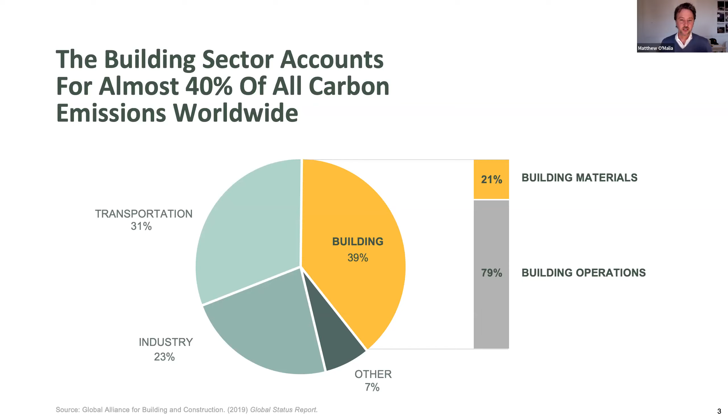When we started with this position, we thought, okay, operations is clearly the problem. Passive house is an excellent solution, let's implement that, we're doing everything we need to do, we're doing everything we can do. But the reality is that's just a snapshot in time about the impact of buildings.

What's important to keep in mind is we're on a continuum of population growth and expanding demand for additional buildings. If we think of the scale of buildings and construction over time, while it's absolutely critical to ensure every new building is built to the highest energy efficiency standards we can, the more buildings we build, the larger the impact on atmospheric carbon because of the carbon required to build these buildings in the first place.

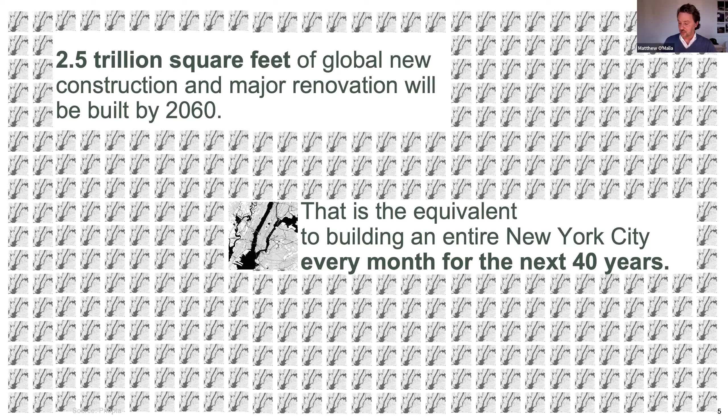When you look at that over time, and the impact of regulations, increasing code awareness, and the drive towards higher efficiency, you realize that going from 2020 to 2050, according to the AIA and corroborated by many others, cumulative operational carbon will be reduced because of energy retrofit, increased insulation, and renewable energy systems, which will flatline our operational carbon over time. But what does not flatline, what will continue to increase, is the carbon required to build buildings in the future.

As a passive house practitioner, the impact of doing the right thing with passive house or high performance building will be seen collectively—from my perspective, starting in 2008 when absolutely nobody had heard of passive house, to today where there are millions of square feet of passive house being built at different types of projects and scales. To me the change is phenomenal and fundamental. While it's still a small percentage of total square footage built in the US, passive house is having a massive impact on the overall mindset and trajectory of buildings.

But the same thing needs to happen with our building materials. And if it doesn't happen, we're going to solve one problem and still have a really large carbon problem with our building material selection.

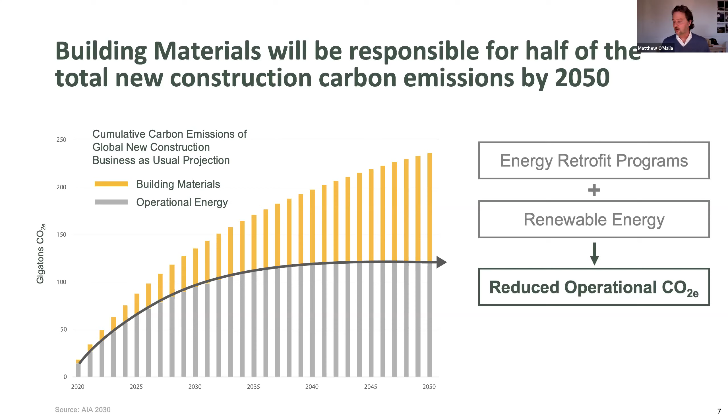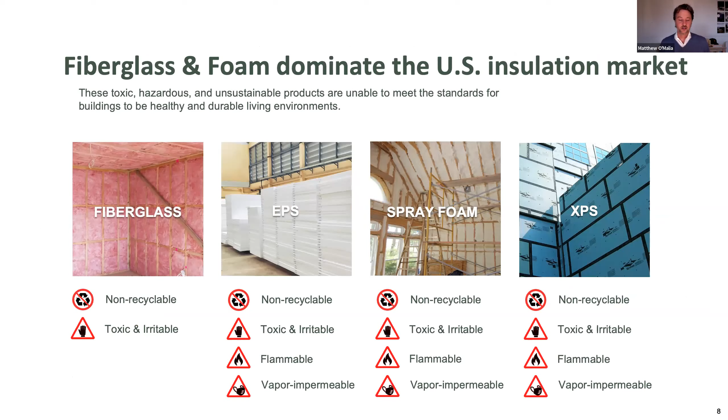As passive house practitioners, one of the differentiators we could control was the insulation products we use, and the fact that these are totally unsustainable options. In addition to being non-renewable, non-recyclable, and in many cases toxic, they also have a high carbon footprint—depending on the material, the global warming potential is extremely high.

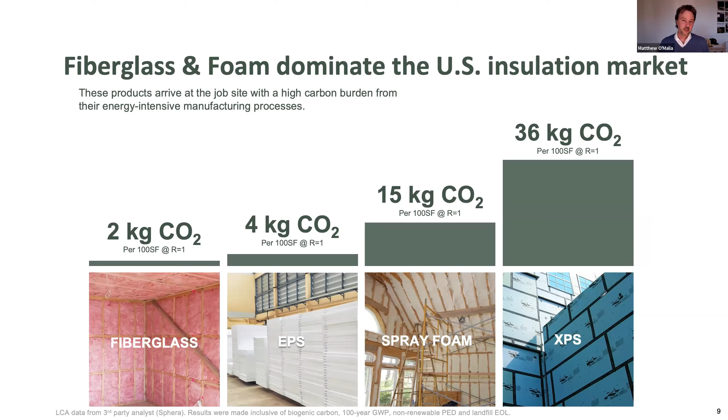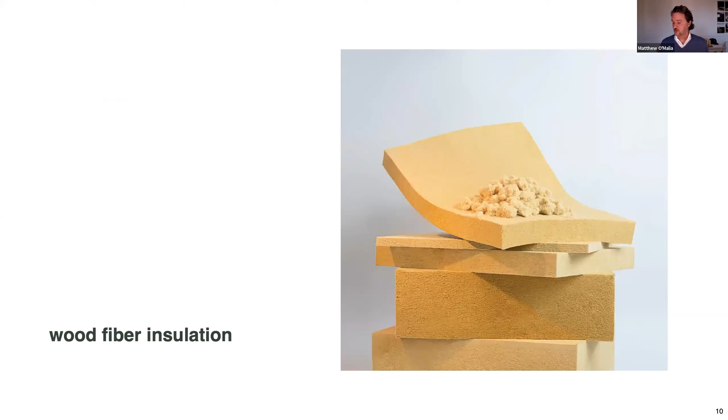As we looked for solutions toward a positive carbon future, we realized that in addition to some other construction systems we'd be using, most notably CLT, insulation is also a big area we should focus on. That's when we started down the road of understanding and developing wood fiber insulation, which has an established track record in Europe of 25 years.

It's the largest, fastest growing segment in the market. What's interesting is when you look at the forest reserves in Europe to create wood fiber insulation, it's actually quite small relative to the United States and Canada. As a result, our wood costs are a third the cost they are in Europe. So whereas wood fiber is a premium product in Europe, for us it will be a cost competitive product.

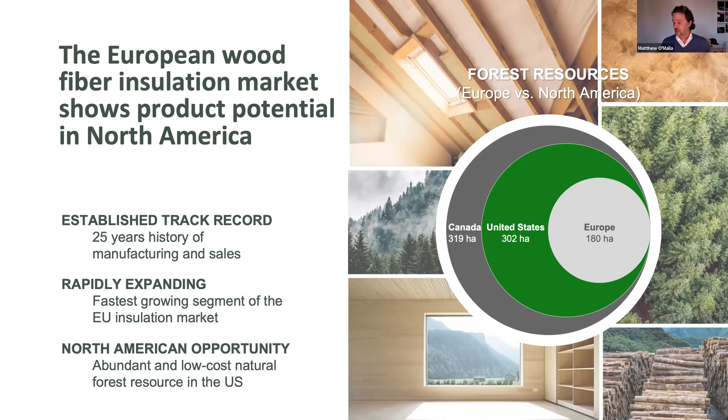If you're not familiar with it, there are 3 products: the blown-in replacement for cellulose, the batt, which is a press fit replacement for mineral wool, and a board product. Based on our early testing, the batt and blown-in have a Class A flame spread rating due to the borate in it, so it's appropriate for all construction types. The board has a Class B, so primarily more residential. But as you'll see in the project Tim presents today, we've done a large institutional project with the board.

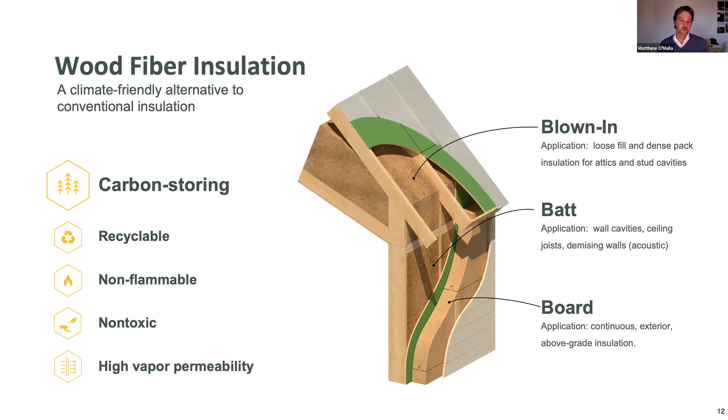One of the key characteristics of wood fiber insulation is it's vapor permeable. Foam, when required as continuous insulation, is completely vapor impermeable and presents a liability of condensation, forming a dew point at the insulation or sheathing layer, whereas wood fiber insulation is like Gore-Tex. It's breathable, windproof, and allows moisture to move through the assembly as a vapor open assembly.

The other big differentiator is that it is carbon storing. Trees, as we know, sequester carbon through their growth cycle. At the end of life, they can either get cut down and decompose and release the carbon, or we can store it in building products.

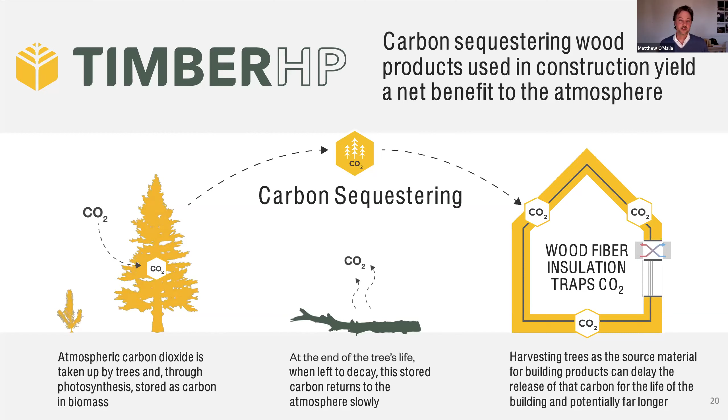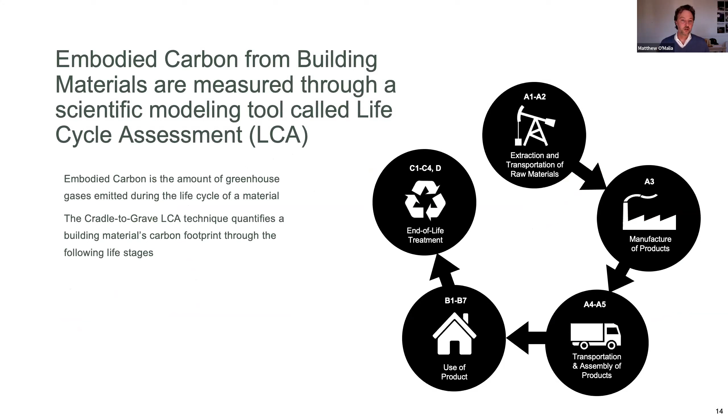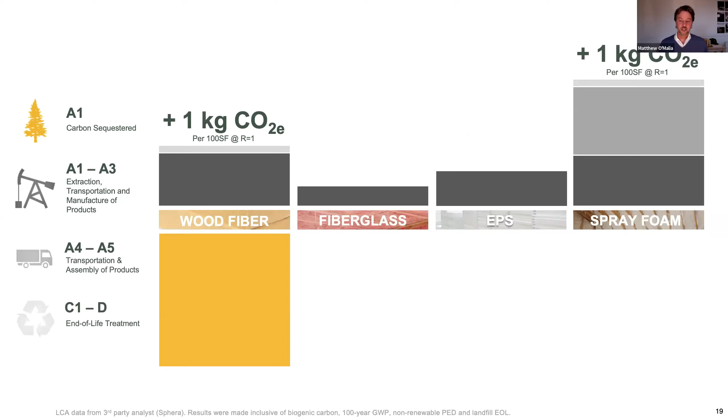That, I think, is the big differentiator from standard insulation products, because when you look at the life cycle analysis, while we do require energy to make wood fiber insulation comparatively, it starts with this negative carbon balance, or stored carbon balance, that other insulations don't have. So when you're looking at the life cycle, starting with carbon, the A1 stored carbon, and then when you look at extraction, transportation, and manufacture of these materials, obviously there's an increase of carbon footprint, as does wood fiber insulation. But the key with wood fiber insulation is that we have that negative carbon balance.

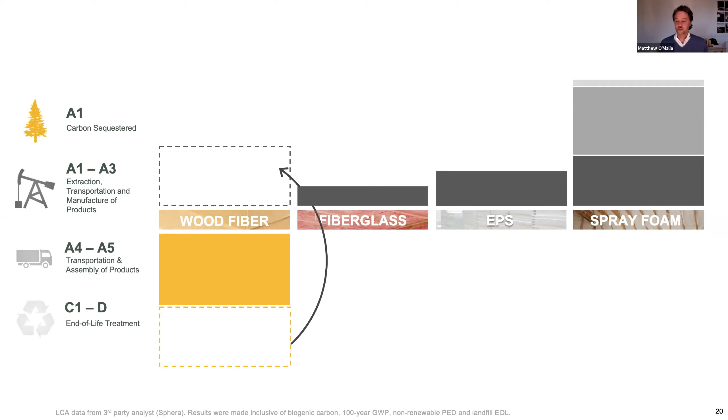This means that when we build wood fiber insulation, it comes to the job site with a negative carbon balance, where all other insulation materials come with a positive carbon balance. Like CLT, the key to wood fiber insulation is it's a replacement for high carbon footprint materials. That's the big differentiator, because for existing mass market insulations, because of their carbon footprint, it takes about 7 to 8 years of operational carbon savings to pay back the original carbon footprint of these materials. Whereas wood fiber insulation comes carbon negative to the job site.

I think the reality is, when we're thinking about retrofit programs, which are there to save carbon and reduce the energy demands of buildings, to think that by installing conventional insulation it takes 8 to 10 years to first neutralize their carbon footprint and then realize the benefit—given the rate of climate change, it's really not a good balance. We need to look at materials which are carbon neutral or carbon negative in offsetting, and wood fiber is one of them.

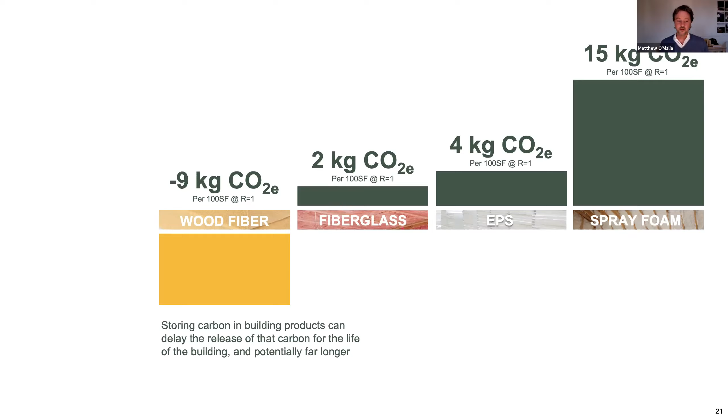We refine them into the wood fiber, add adhesives, press them, and then have the 3 product line, which is the board, batt, and loose fill. So in all, a very low energy intensive process, which maximizes the stored carbon in each of the products. Timber HP.

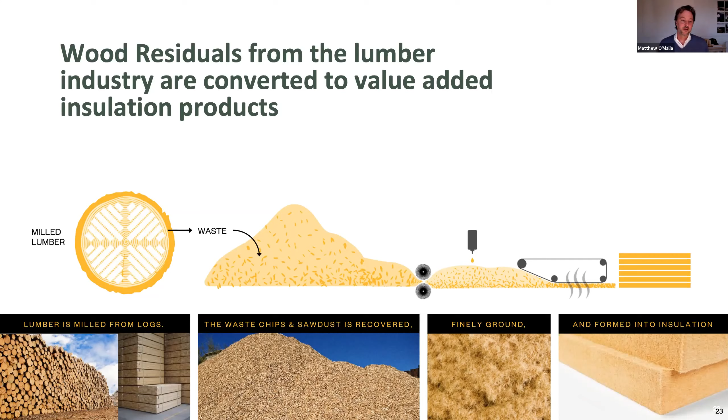GoLab is a startup, and part of what we've done is we've purchased manufacturing equipment from a used plant in Germany, and we just had it shipped to the US. It's just arrived in Searsport, Maine. We also bought this massive 200,000 square foot manufacturing facility, which was the former UPM paper manufacturing facility in Madison, Maine.

It used to be called the New York Times paper mill because they used to produce the Sunday section of the New York Times there. Like so many paper mills in Maine, we've lost 6 since 2016, which has had a net negative financial impact on the state of $1.6 billion annually.

So what we've done is we bought this wonderful facility, built in 1980. We're going to be installing new value-add processing equipment for this new product, revitalizing the mill, bringing jobs to Madison, Maine, to the tune of 113 new jobs, and really providing a value-add stream for the Maine forest products industry, which is hurting.

That's because of the decline of the paper industry. So I think this is one of these interesting cases where the synergy between a new environmental, carbon sequestering, high performance product—which is cost competitive with standard insulation products out there—is the catalyst for economic regeneration in Maine and rural communities, which is so important, particularly in a state like Maine where we've been so devastated by that, as well as being a highly sustainable environmental solution.

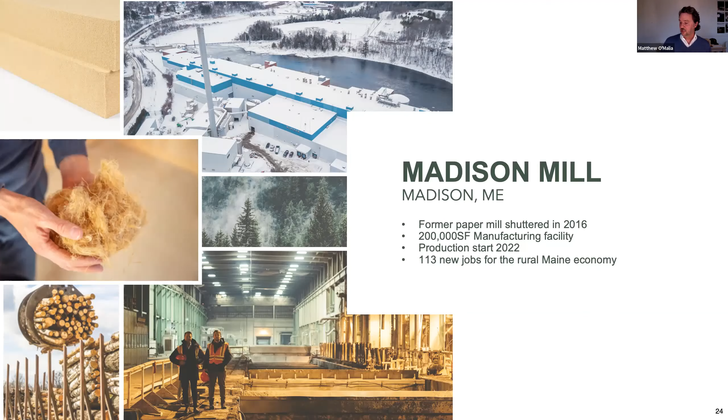I'm going to move briefly on to a project that we recently built, which is this prototyping of all wood construction—a project in Lake Waramaug, Connecticut. It was a CLT wood fiber construction. It was a funny little lake house.

It was a pre-existing condition in the shoreland zone, so it was an existing non-conforming structure. We had this very tight little cottage shape that we could build within. So the form of this building was completely dictated by the pre-existing structure that we could not expand from, and we inherited this funny little cottage form.

But the thing we wanted to experiment with was the idea: what happens if we take a really complicated form like this and use the CNC cutting of CLT, the precision of that, to make this really complicated shape? Most people assume CLT should be used for multifamily, lining up regular structural systems. We said, what if we don't do that? What if we use the export from our computer model into production as the catalyst for using CLT?

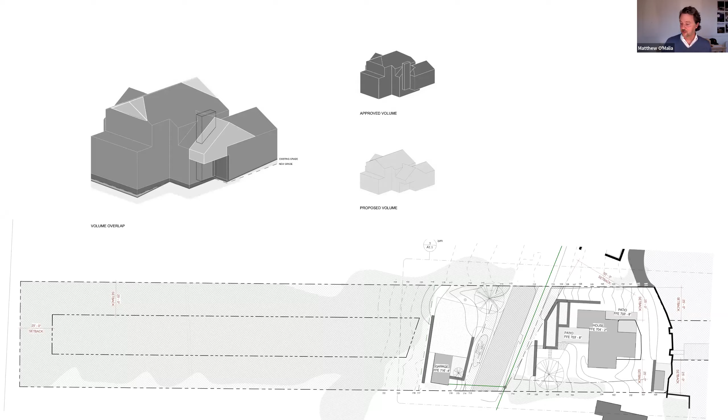So managing the complexity of that building form—that's exactly what we did. We took this 1,500 square foot plan, built to the Passive House standards, triple glazed windows, high performance exterior wood fiber insulation throughout. Very simple program, basically a 2 bedroom plan.

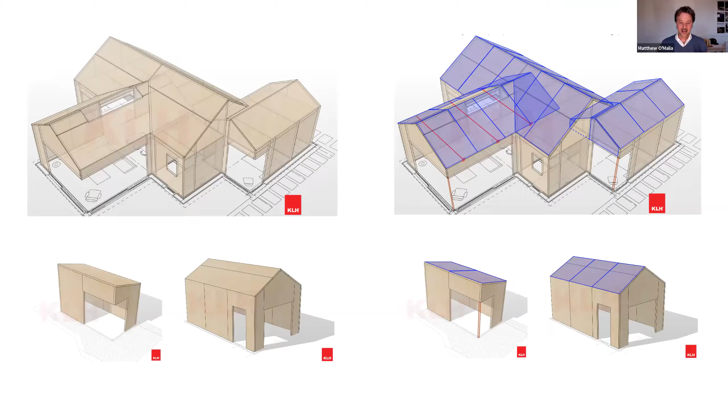We created a computer model of it, working with KLH, an Austrian CLT manufacturer, and had them create, as their process goes, a very, very detailed CNC computer model of the CLT. As you can see here, there are a lot of options in how you can structure CLT, so there's a lot of control in the design process. We worked with them on that, and they produced this incredibly accurate model that we had the opportunity to put together very quickly on this very tight site.

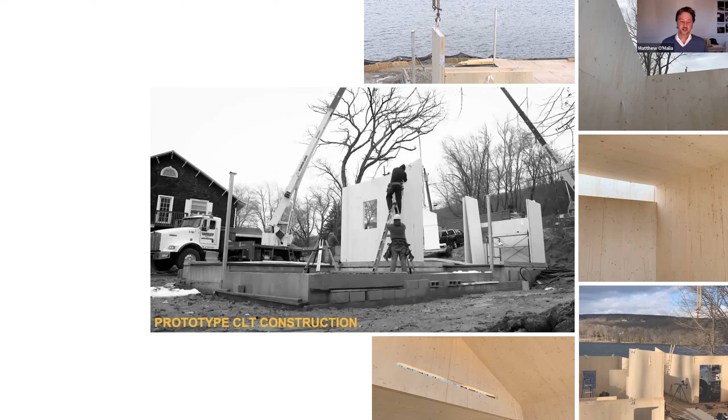I don't know if this video is going to play or not—here we go, I'll explain a little bit. This is just a little video showing how we installed this CLT project. As you can see, all the elements are pre-cut, very fussy construction. It was like 4 days in November, windy, nasty, rainy. So if you can build a building in 4 days in that condition, you can build a building pretty much anywhere.

But what was really important to us as a proof of concept is that the level of precision of the CLT, the dimensional stability, and the accuracy of the cutting was a great way to leverage construction going forward in order to control or reduce labor costs. So while it's totally appropriate for multifamily and large scale buildings because of fire resistivity, it's also really appropriate for smaller scale structures because of its exact precision and ability to increase the efficiency of the construction schedule.

So again, some of the shots are on the CLT there as well. In terms of the detailing, as you can see, there's a wood fiber shell—it was actually quite complicated with inboard gutters and a lot of very fancy detailing. Here's an image of the wood fiber insulation being installed.

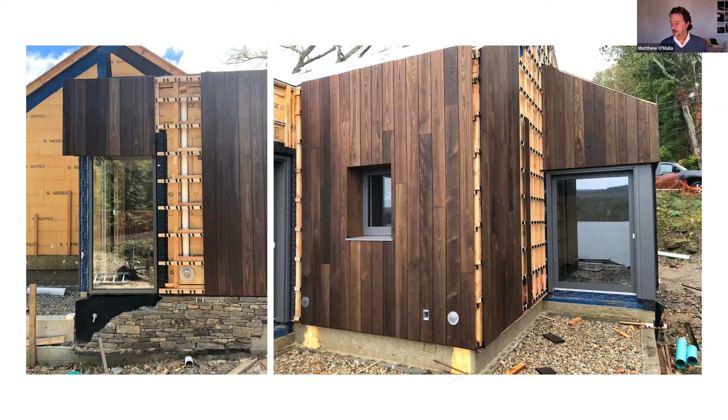As you can see, we ran downspouts, another layer of infrastructure within that behind the facade system. The roofing system was actually a Tesla roof, which we liked a lot because, as you saw from the form, it was very complicated. There wasn't a large south-facing exposure where we could do a lot of south-facing solar collection, but with solar panels on every surface of the building, we have a much greater ability to have combined total collection.

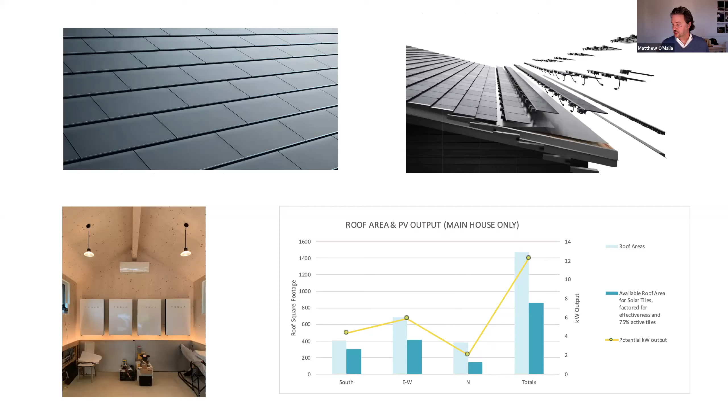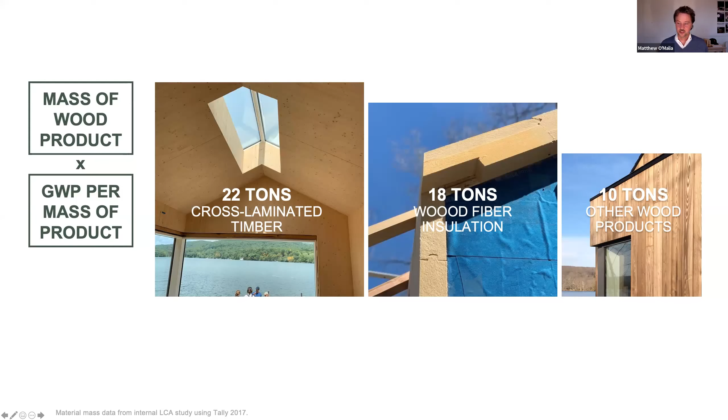Just to run through the numbers, we're trying to go for this negative carbon building, both in operations and embodied from construction. So looking at what we did: 22 tons cross-laminated timber, 18 tons of wood fiber, and 10 tons of other wood. A lot of people default to the other wood because that's easy and available, but the cross-laminated timber and wood fiber insulation is really where you find your gains, as you can see in this slide.

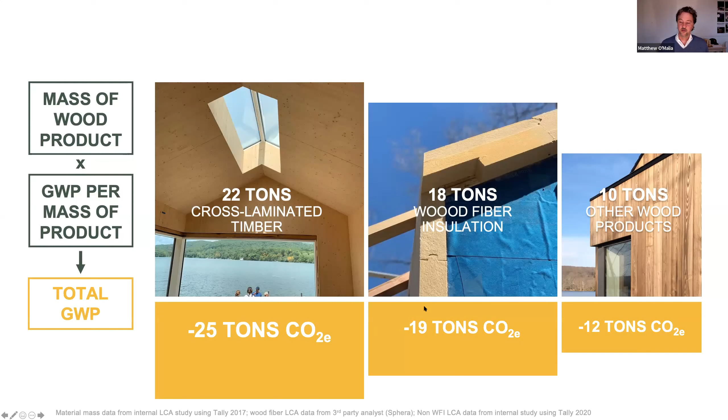So when you look at the stored carbon, or the carbon negative footprint of these buildings arriving to site, you can see the relative impact. CLT is always the big winner, given the mass, the density, and the scale, but wood fiber doesn't do so bad itself. In this case, CLT isn't replacing concrete structure or steel, so you don't have that offset—it's residential, so it's replacing wood. But obviously when you're talking about steel structures going to CLT, you have that offset.

When we look at the carbon footprint of the other building materials combined, we look at the offset of the carbons to come out with positive 23 tons of CO2 per year, which obviously isn't carbon negative to begin with. We're trying to figure out how we do that. We haven't gotten there yet.

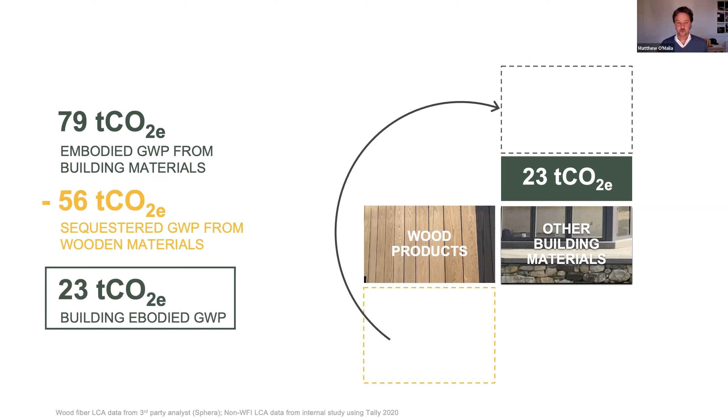But alas, we do believe that it's important to take into consideration on-site renewable energy production as a way to reach those goals. Therefore, using the Tesla roof, when you look at the embodied and operational carbon combined, or global warming potential combined, the embodied global warming potential is a constant—you start with that amount of carbon and you stay with it—but the operational is cumulative.

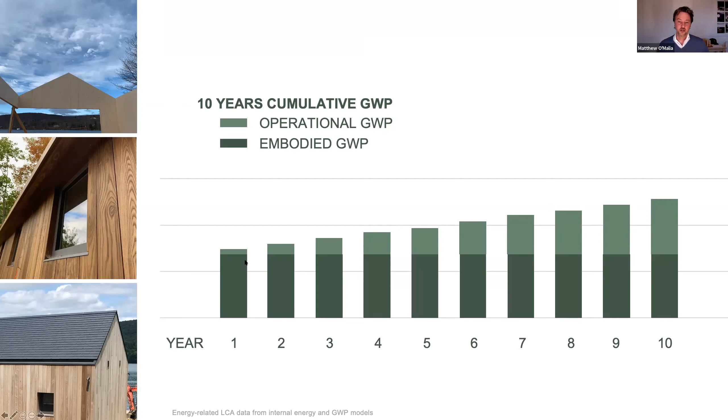But then when you're offset with our production, we're carbon neutral for the entire building at around year 7, and we go into negatives by year 10. Every year forward, we will have a positive impact on carbon by having built this building.

So I think that's what we really see as the opportunity. I don't think architects have really thought of it in those terms, but in building a building, we can have the impact of actually reducing atmospheric carbon because we built it. That's what we're proposing here: thinking of it differently, not accepting that every building has some amount of environmental negative impact, but thinking with the right kind of construction materials and on-site renewable production, that every building we build can actually be a force of positive change in the environment going forward.

And for us, that's what we founded Opal on, is that belief. We're trying to put that into practice with every project going forward.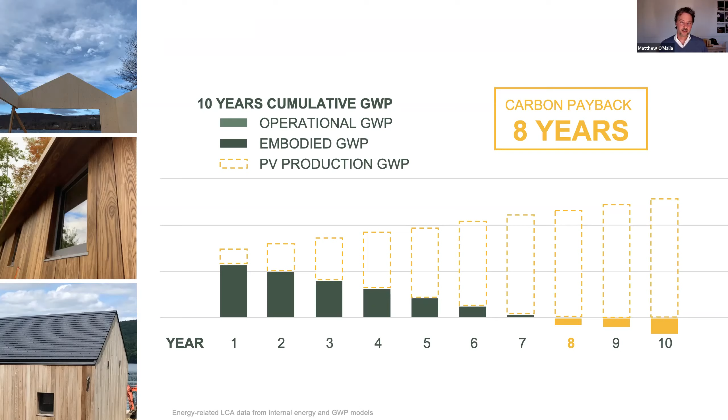So what I'm going to do now is hand it over to Tim, who will take just a second here, and he'll talk about how that works and plays out on larger scale projects that we've designed recently.

So this is a project on an incredibly tight site in Beverly on an existing campus. It was an old residential cul-de-sac that got turned into a campus over time. They have this very challenging site between a lot of conservation overlays that also has this radical topographical change within the depth of the building of 11 feet, currently mitigated by a long circuitous outdoor pathway. It wasn't accessible.

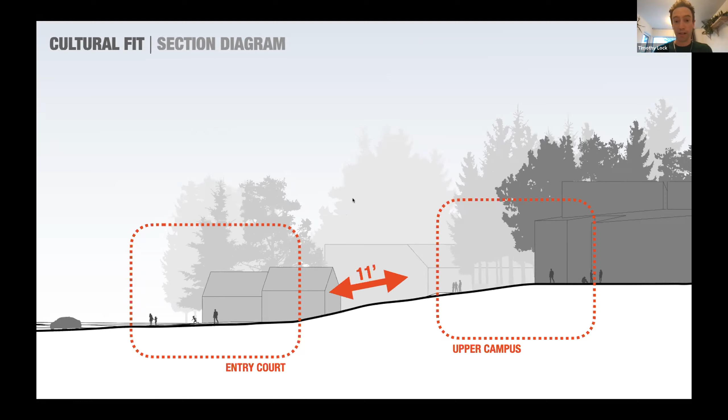So the building had this challenge of becoming an active bridge between upper and lower campus, but then also we are 100% committed to being a certified Passive House. Like, okay, well, we've had this challenge before, let's try it again. And then added to that was this communal aspect to the school - they actually polled the entire student population.

This is grades 6 through 12, on what they wanted in the space. And this crazy thing that came out of it was this idea of adventure - they have this forested campus, they want it to be this adventurous building, which added another layer of complexity to a Passive House approach.

The gut reaction as a Passive House would be to say, okay, we want to make a bar building because it's as compact as can be. It has as small a volume as possible to surface area, which for us in COTE makes sense - that's going to be an achievable Passive House. But then it just has this kind of cobbled-on bridge to get to upper campus as part of that necessity, and we're like, that's not really doing much for us programmatically.

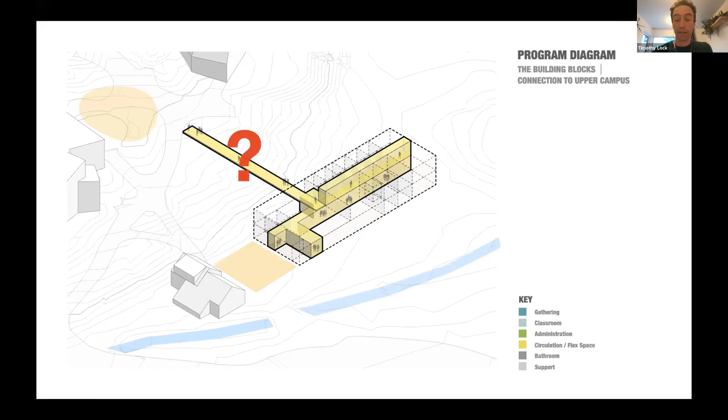It's not doing much for us as architects, as designers. Well, what if we thought about the program actually becoming that accessible bridge to the upper campus, and the building becoming the armature for that accessibility? That was a great solution that everybody loved.

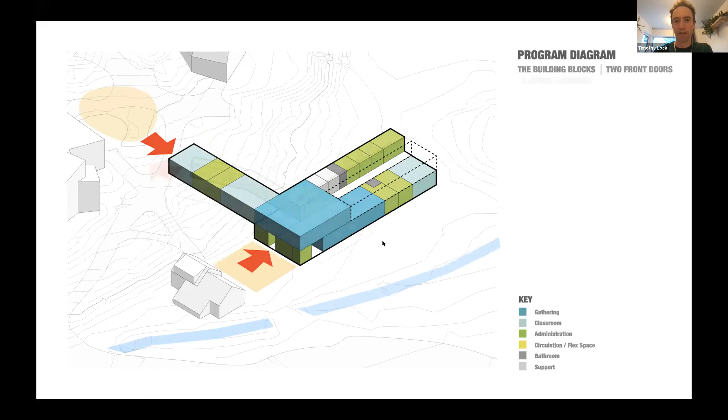But what we didn't know at that point was, could we certify that? We kind of said, okay, well, we'll accept that challenge. We did allow it to shift and manipulate to try to access that grade specifically, and then become this kind of bridge from that entry court up to that upper campus as a wedge structure. All of these decisions were made without confidence behind us to say, well, I hope we can pull off that energy ask in the end.

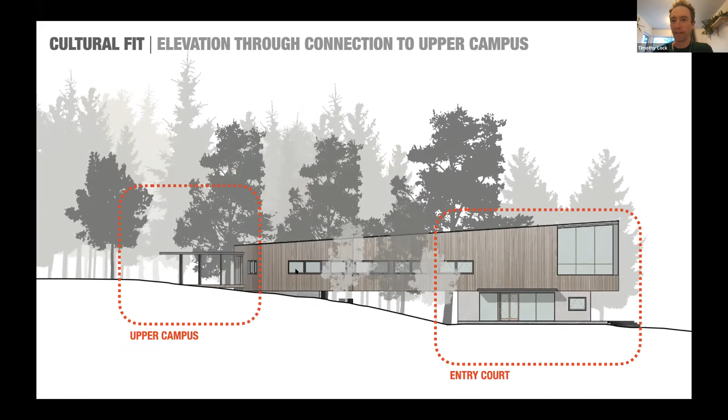And then just an elevation through that same bridge structure, looking up through the program spaces into that upper campus from the design phase.

It also involved several communal spaces for the entire school population when it's within its building. So not only does it have this complex form, but it's also a high occupancy building, which those of us familiar with Passive House work might know becomes a particular challenge in the area of overheating. So again, stacking up the challenges and trying to march forward with a building that can be transformational and still achieve a high sustainability goal.

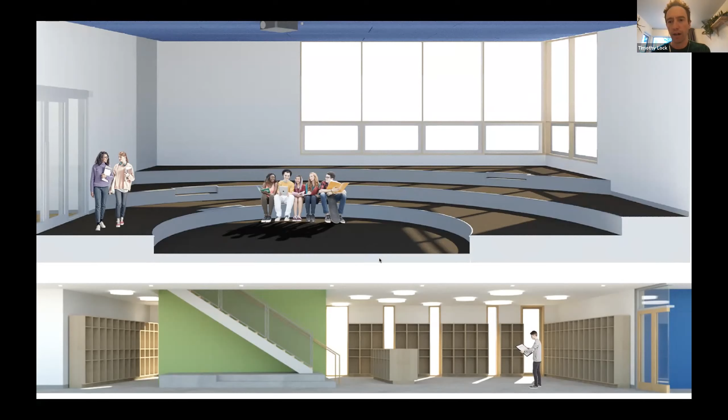We knew that we had some things to help us in that. We had the ability to locate those high occupancy spaces on the north side of the building, to try to make sure that we're not overheating spaces that are exposed to solar gain.

And when we were starting to look at the early energy models in PHPP, we were starting to get that kind of feedback loop that we know is going to potentially be a successful Passive House, where we're getting close to a 1/3, 1/3, 1/3 breakdown of heat production between the sun, the people in the building, and the mechanical heating system itself. So it was looking like it's definitely possible.

And so we continued forward with that. And we were able to utilize that form, that bridge that connected to the upper campus, as a circulation armature that we could actually lock into a little bit of solar gain there.

And typically on some of our higher occupancy buildings that we have gone to Passive House with or certified all the way to certification, that's always been the push and pull: how much solar gain can you actually use? It flips the script on a residential home, as those of you familiar with Passive House might know, where we've got to be really sensitive to those overheating conditions. But being able to use this armature of the hallways, which are not highly populated, as a way to heat the building passively,

ended up becoming actually a successful solution, because it kind of created this knuckle, and all the program spaces could sit on the outside of that.

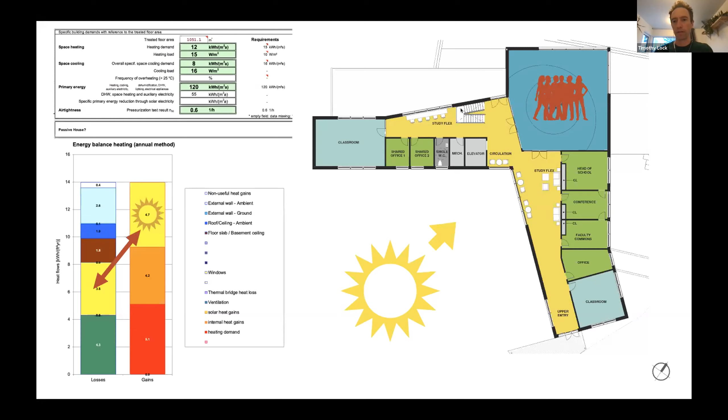And we were still able to achieve the things that they really needed out of the space, which is this great all-school meeting, by situating it to the north. The north also happened to be the entry approach, so it could become that beacon that the school was hoping for in their first building project in 16 years. It was a very important building, very present on the street and approach to the school.

Just another rendering from the upper campus, where that 2-story bridge allows it to feel lower in the landscape and not take over the upper campus where their other academic buildings are.

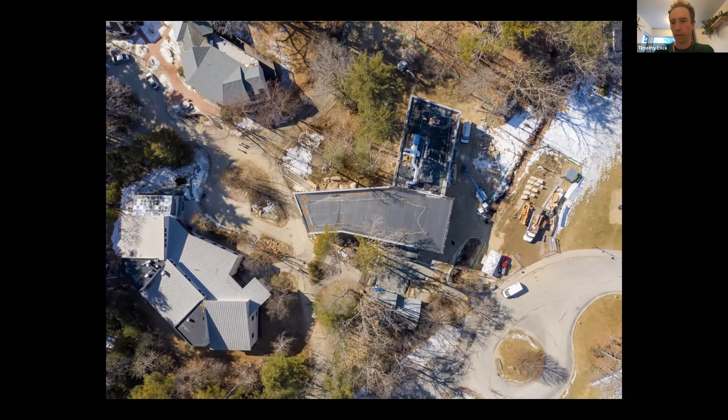And then just some shots. This is from actually 2 weeks ago on site, some aerial drones, and you can see that canted volume that reaches out and becomes the bridge to the upper campus, meeting as a 1-story building with their other academic buildings up on that hill.

And then extends out to become that facing facade to the street. And then another drone view looking down at that facade. Again, still in construction - we had a couple weeks left, as I mentioned.

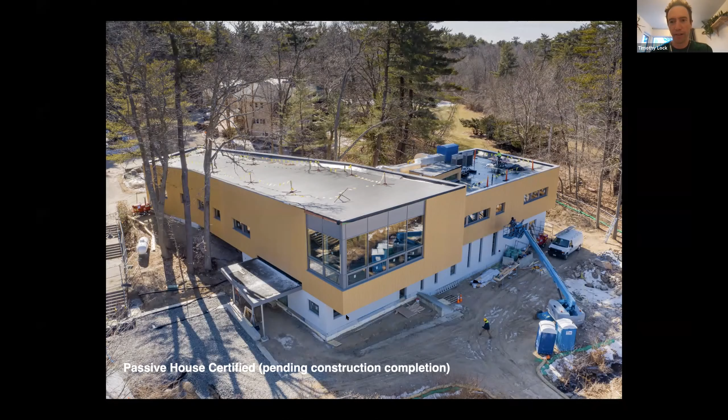But it's on track to be Passive House certified. Their final blower door is actually tomorrow. Luckily, they've done a preliminary one, which passed. So we're knocking on wood still until tomorrow evening, but it's looking like we are going to be certifying this building, which is super exciting.

And not only that, but we're able to pull it off at their budget, which is maybe the last challenge that I didn't speak of at the beginning, but probably the most difficult one. This building, independent of site costs, came in at $275 a square foot and will be Passive House certified.

So again, it's about trying to lean into that experience and that initial dedication to Passive House as a way to take on new typologies, new challenges, and push that potential for buildings to improve climate forward.

This building really focused on Passive House as its key goal criteria for sustainability, so it wasn't looking at an overall building materials objective.

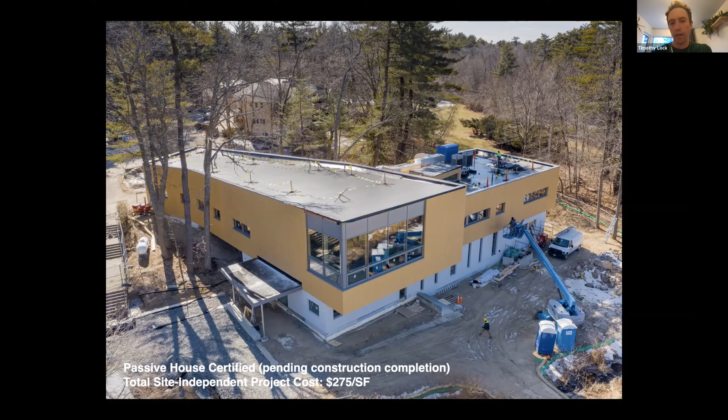The next project we're going to share is even larger in scale, about 27,000 square feet. It's for College of the Atlantic, which is also finishing up—they're occupying this building in 2 weeks. The building is turned over and we have a Certificate of Occupancy. This is a project where they wanted to take that all-wood approach all the way throughout the building and become a real beacon for what high performance building could be at scale.

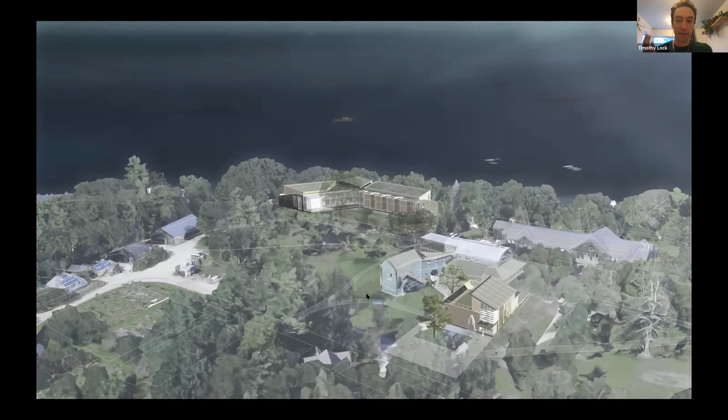College of the Atlantic, for those unfamiliar, is a very tiny campus that took over some old carriage houses and summer homes from the early 1900s on the coast of Frenchman's Bay in Bar Harbor, Maine. It has direct access to Acadia National Park from its campus, which is very unique—probably the only campus in the US that could claim that. They also pride themselves on being the greenest campus in the US for 4 years running, so it's a pretty high bar.

They came to us in collaboration with Susan T. Rodriguez out of New York City on this project. They came to us specifically because they needed to align with somebody able to match their sustainability mission. This campus came with a sustainable action plan that was 9 sections and about 20 pages long—the most specific action plan I've seen from any institution. But this was the first building that had ever been taken forward to implementation under that action plan. It was really important to me because I grew up about 30 minutes from that campus.

This is actually me on top of Cadillac Mountain as a 4-year-old, with my mom and my sister. You can actually see their campus from the top of Cadillac Mountain, which for those who don't know is the point in the US where you can first see the sunrise every day, and it's part of Acadia National Park.

It was a super exciting challenge for me to be involved with this project because of that personal connection. As I said, they came to us with this criteria for performance goals and objectives, as they called it, across 9 categories. We set up this matrix early on, because hitting all of them required a lot of management.

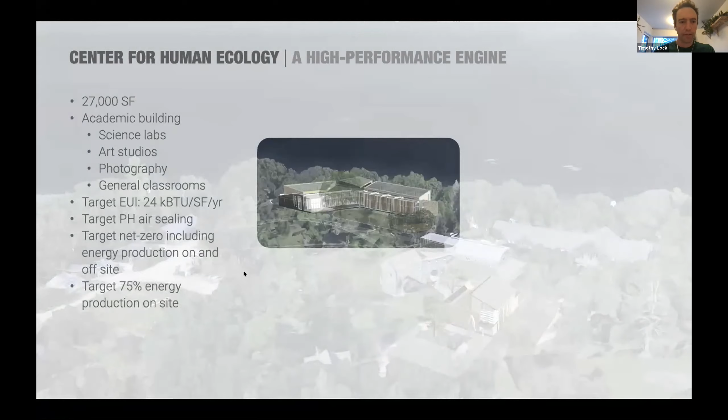With experience in other academic projects and other large buildings at the time, we were able to think about a synthesis for this building as to how we would approach a Passive House solution.

As you may have seen from our presentation, we like to come up with monikers for the different projects we've done. There was the Alnoba project in Kensington, New Hampshire, which had recently been completed—we called that one Everything Passive House, because it was a building with all these crazy different spaces: commercial kitchen, active wood burning fireplace. We were thinking, is there any possibility to certify this? That's why we call it Everything Can Be a Passive House.

And this tiny school in Belfast that we've done recently as well, which was on maybe the lowest budget we've ever done for Passive House.

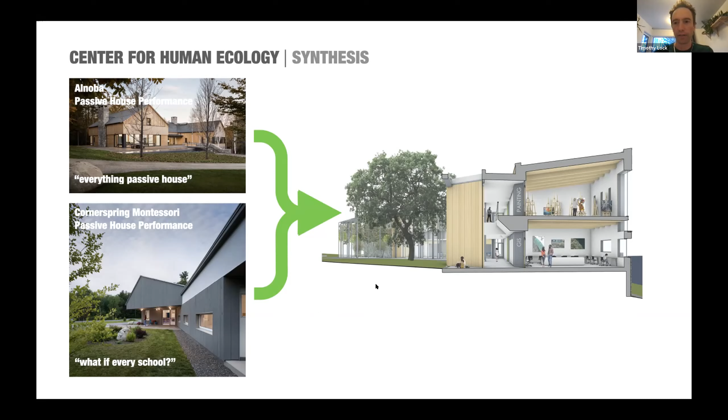We're like, okay, well if we can do an academic building and do this really complicated thing with all these different programs, what if we were to synthesize them together and think about a building that's twice the scale of Alnoba, but with programs similar to a school?

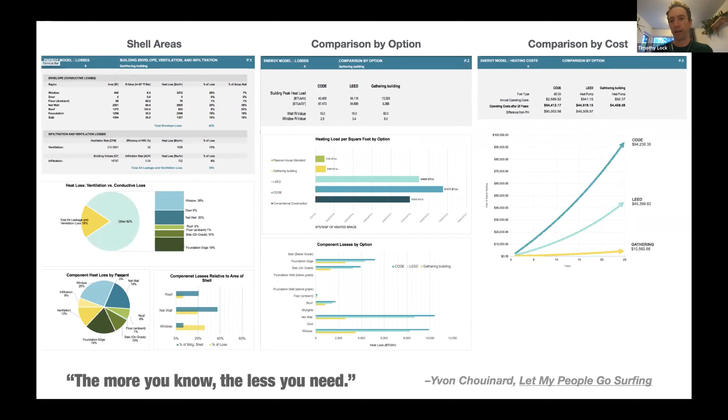And that became kind of the mantra around this project. We got into it right away with energy modeling. This is another quote we like in the office: the more you know, the less you need. Because we're early adopters of Passive House, we energy model internally all of our buildings. We require all our staff to know how to run an energy model. Knowing all that from experience allows us to make initial decisions right away and not have to wait for that testing to catch up with the design.

And it put us in position for success on this project specifically. But there are two key areas of the building. This is our first purely academic building that we'd done. It has not only a full higher education chemistry lab, which is up here in the corner of the building, but also, unique to College of the Atlantic, a zoology lab where they dissect mammal carcasses, sea mammal carcasses from all over the coast of Maine.

So Allied Whale will bring them a whale that they've found, a beached whale or a beached seal, and they'll do dissections in this space. Doing dissections of a dead mammal requires 12 air changes an hour during dissection. The chemistry lab requires 6 air changes an hour during active experiments. We'd never approached a Passive House solution with that much air having to be moved.

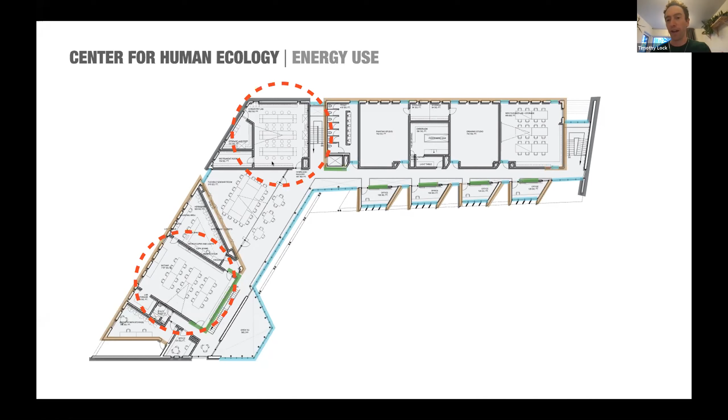But we got into it right away and learned quite quickly that the ventilation component was going to be 40% of our losses. So we custom designed with our mechanical engineer a direct outdoor air system, an ERV, that is literally 30 feet long and 10 by 10 square, with a 9-foot diameter enthalpy wheel that allowed it to move slowly enough that we could recover enough energy from that zoology lab at max capacity of air changes to still get that energy level below the threshold needed to achieve the energy conservation levels necessary for Passive House.

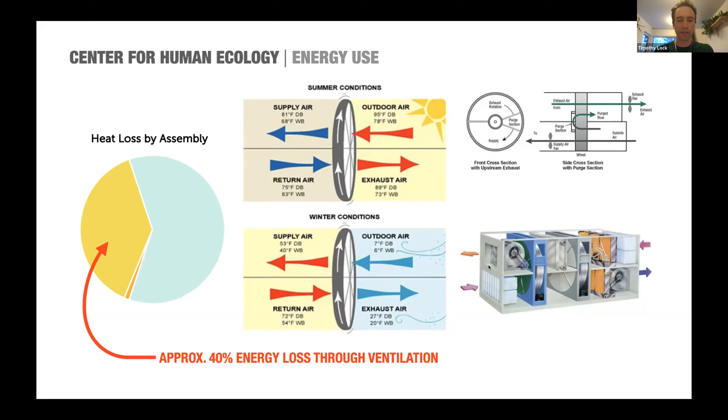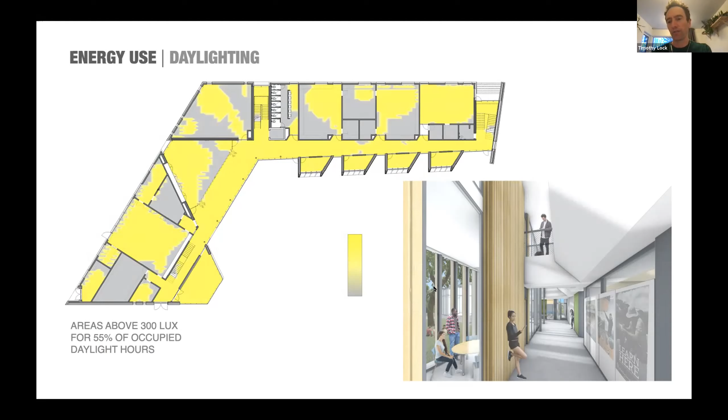Also, daylighting and active daylight harvesting became a key component to reducing EUI on this building. It also happened to be a parameter within their matrix, which was the first time we'd seen a college actually put a line in the sand about daylight control, automatic daylight control. Usually if you have a LEED project, you might engage with that, but it's not often a directive from the client, which was unique to this project.

What that meant in the end was that we got really, really close to their EUI goal just through the design parameters. We were at 25 kBTU per square foot per year. Their threshold in their matrix was 24, but that was before we added in the renewables, which was also directive.

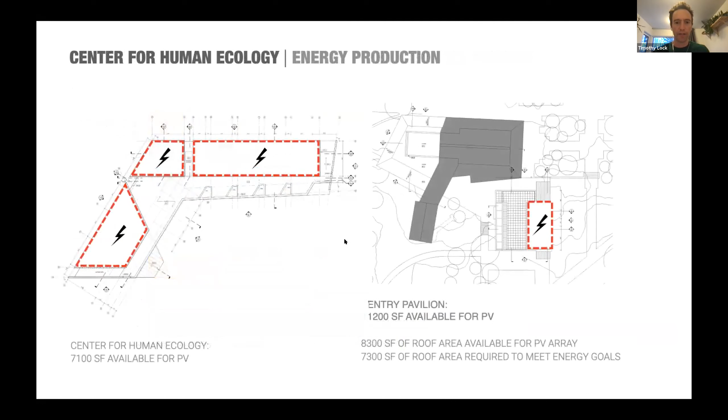And luckily, just in their site—sorry, what's going on here? Oh, sorry. With the added renewables, we were able to bring that EUI down to 11 kBTU per square foot per year, which outpaced not only the targets for AIA 2030 at the time, but also the targets still 4 years in the future from now.

And when I talk to firms about signing up for the AIA 2030 challenge, or what they would need to do, what first steps could you take to try to start thinking about reporting on DDx and achieving those goals? I always say look at your biggest building and try to make that as good as possible, because that's going to be the thing that's going to be the rising tide that raises all ships in your office as far as averages. And you do have a lot that you can do with these larger buildings. This was, I think, a good example of that, leaning into that kind of baseline approach of Passive House.

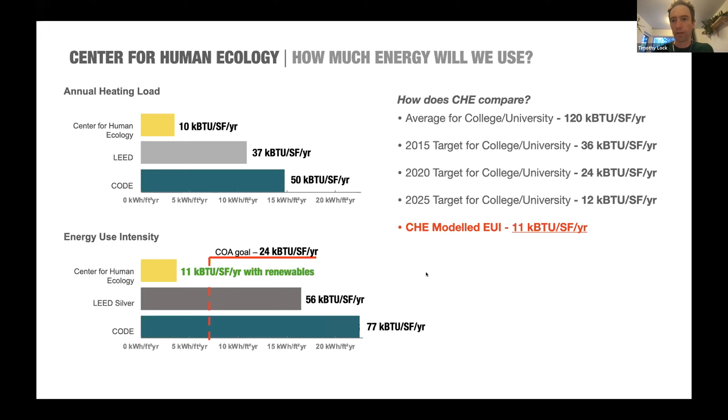The other big thing that we started to learn is that activating spaces allowed us to actually reduce EUI in a lot of cases. They had a lot of old buildings where students just wouldn't hang out because they weren't designed as public spaces for congregation. Just increasing their occupancy expectation actually helped increase the passive heat gains in the building and reduce their EUI. This kind of blew their mind a little bit, because they had all these old dark spaces and the kids didn't want to be in them, but create a nice bright active space, and all of a sudden that full-time equivalent allows us to inch the EUI down a little bit.

And so then thinking about ecological habitat, incredibly important to them, close to the park, close to Acadia National Park. We did make this project a case study for bird-safe glass as well.

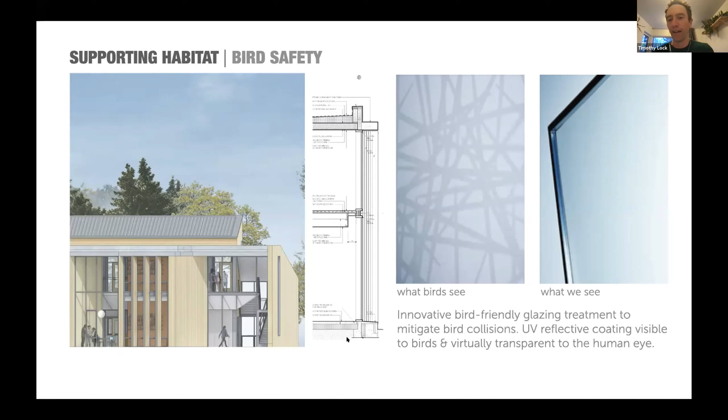One great overlay with some of the earlier work we did in Passive House was we're very experienced with importing products from Europe, as Matt described in detail. We learned quickly that Ornilux glazing is expensive here in the US, but as originally a German product, the window manufacturers we were already using for a Passive House approach offered it as an option for the glass. We didn't even know that until we asked the question, and we're using Ornilux throughout this building.

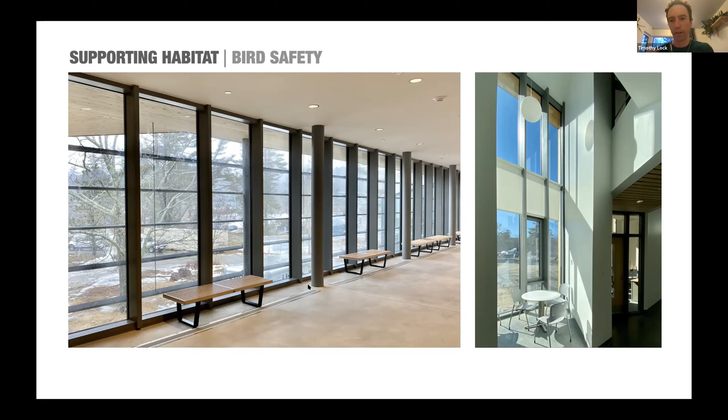Now that the glass is installed and the building's nearly finished, it's a really amazing product that's truly optically clear from the interior to the human eye, unless looking at a very oblique angle. So far, so good, we haven't had any bird strikes yet, we'll see how it goes. We've signed on with Maine AIA COTE, who's made a dedication to habitat and bird safety in our state, as a case study project, so we'll be monitoring this project over time and trying to record if we see any instances of that happening.

Another key component, of course, is the sustainable resource stream and materials. This building, as Matt said, became a real test case for how you could take the concept of carbon sequestration to scale in a larger building, and how far you can go with it.

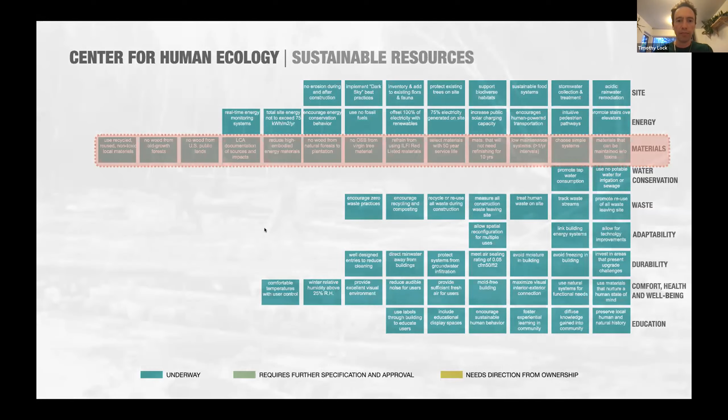When we think about resources, as architects we might think technically about it, but there was a time in our state where this is what we meant by resources: the log flow down a river in northern Maine. This was our natural renewable resource. I don't think anybody would be thinking about it that way, but it's what we were building everything with, it's what we were making into paper.

There was an interest at the college in going beyond what, 10 years ago, we might have thought of as sustainable material specification, which would just be local and natural materials, and thinking from a data-driven perspective about what that meant. So really it's about all those computations and calculations that Matt presented about sequestration and taking it to scale, not necessarily just thinking about materials as surface finishes.

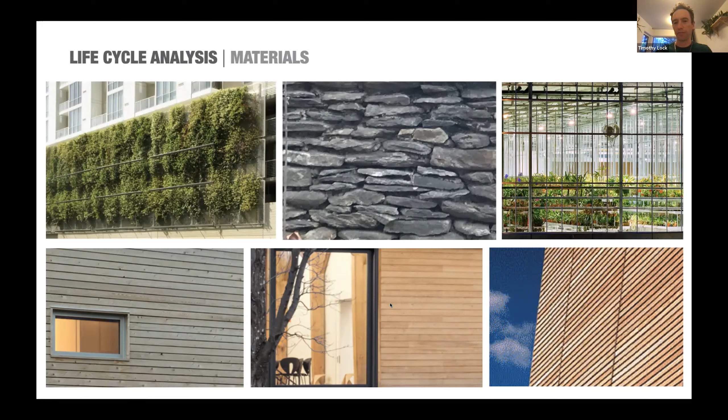So this building does what Matt described. It's not just using the resource of wood chips for wood fiber, which is cool because this is a 30,000 square foot building, all wood fiber insulation. That's exciting, but also then looking at how we can use mass timber, sourced sustainably and locally, and make that a structural system for a larger building.

A building that would normally be thought of as steel and concrete, that would be the gut reaction for the structural engineer, this is how we should design this building, but we tried to think about a similar structural system in wood. We kind of leaned into that and went for it.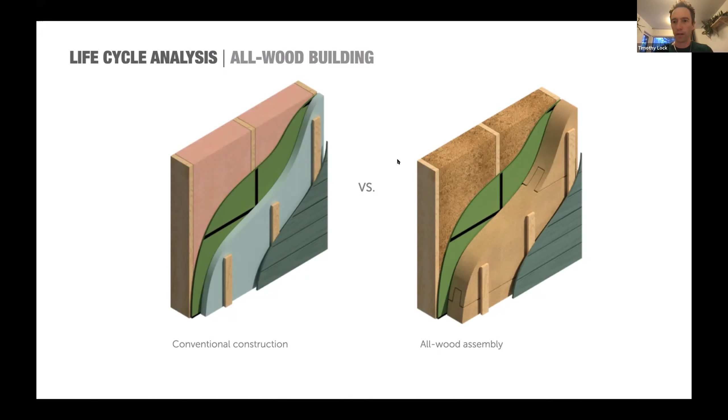So we're talking about an all-wood assembly here, a wood-framed point-loaded structure. It's a mass timber building, but not CLT, so glulam beams, wood infill walls, wood installation, wood fiber insulation, as Matt described in his section of the presentation. That carries through all the way: interior finishes, there are some non-wood interior finishes, but we have lots of wood interior finishes as well, all wood exterior siding, and of course the wood structure and wood insulation.

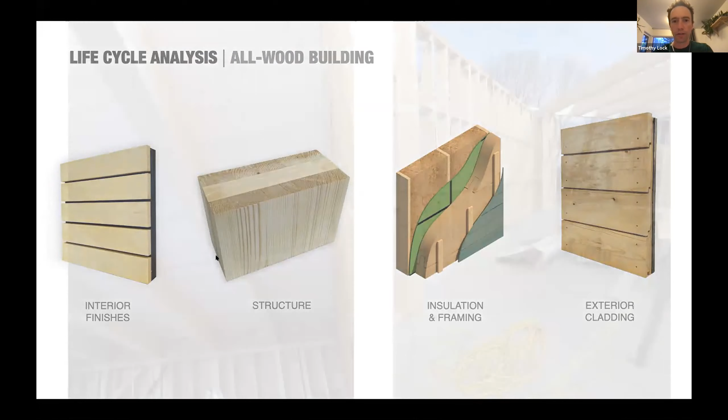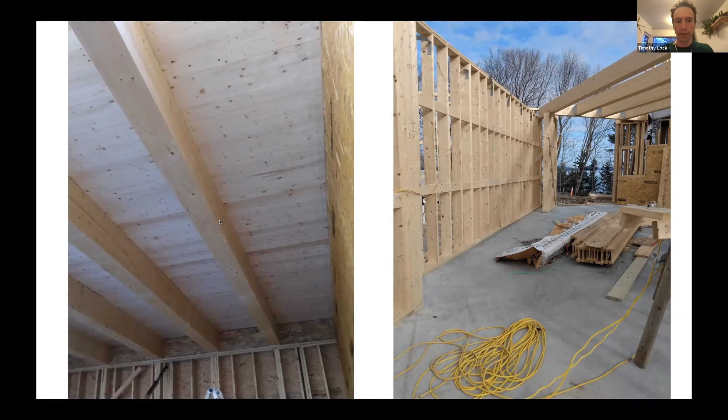And even in the spaces where the glulam beams end up being concealed, we're trying to reflect that in the ceiling finishes as well, and the wall finishes in places, bringing that wood — this is Eastern white pine, locally sourced — into the building. This building has a very industrial character in the way it's finished out, with a lot of exposed utilities, but that was largely to show off the assembly as much as possible, and make sure there was a didactic relationship between the building and the students eventually getting educated in it.

Just some images of the exterior. This is a corner of the building, all Eastern white cedar siding as well, so locally sourced siding.

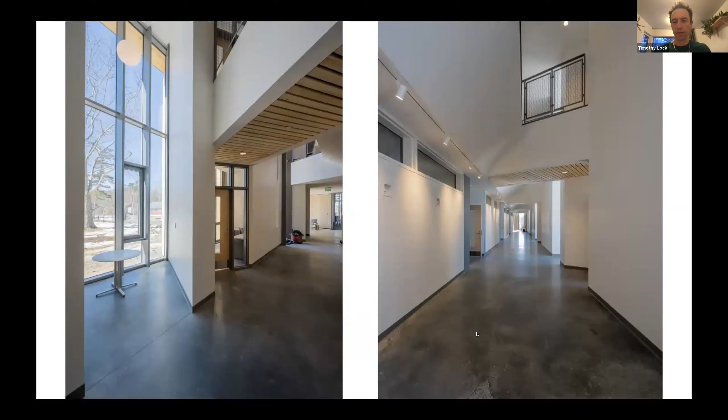Some images within the building. This is the central corridor, or the kind of armature that wraps around the interior space framed by the building, which everyone congregates through to the classrooms, and these bridge connections go to the upper corridor to office spaces on the outside, which you can see through this door.

And we took that into Tally. We use Tally for our life cycle analysis through Revit. It's an awesome tool. We've learned, because we tend to be tire kickers in our office, that it's really only as good as the data sets — but that's a question for another talk about how LCA works. We started to analyze quite early the structure independent of the rest of the building, to see what would happen, from a life cycle and embodied carbon standpoint, global warming potential standpoint, if we were to compare it to a steel and concrete building.

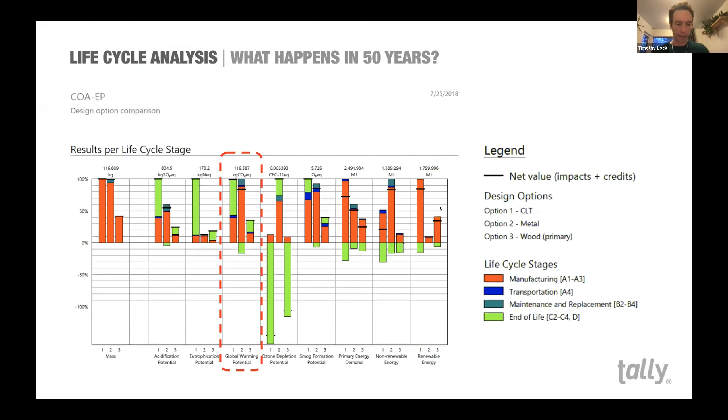What we learned quite quickly is it's very similar to the math that Matt had shown on a very, very small project — that's about 1,300 to 1,400 square feet. This is 30,000 square feet. The math scales pretty easily, and we can get this big negative carbon situation, negative global warming potential, from sequestering so much carbon in wood. Wood is 50% carbon by mass on average, depending on the species. So you can do a lot with all that carbon that gets soaked up in that tree when it's alive. It's our single greatest renewable resource as architects, and leaning into it at scale really starts to move the needle a lot.

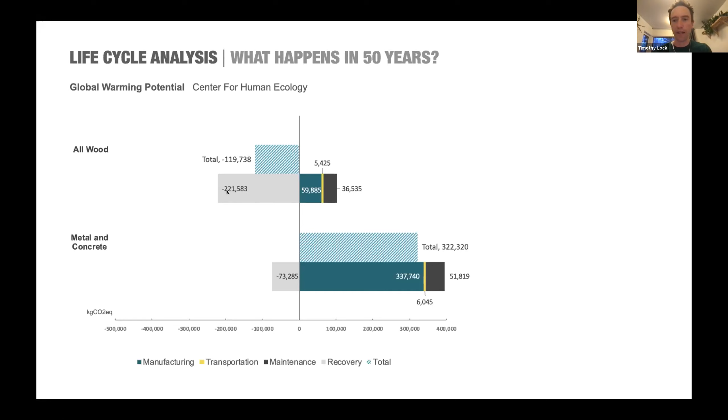When we take that to the entire project, we were able to show the client these numbers, which were very exciting to them — that we were saving over 5 million kilograms of CO2 equivalent over 50 years, combining operational energy reduction through Passive House with all that carbon sequestration in the structure. That was the equivalent of driving a Prius for 2,400 years, or driving their night bus, which takes kids around to their rental houses outside of campus in Bar Harbor, for 355 years. They could drive that for that long with the amount of carbon they're saving in this building.

It was fun because the president of the college has this 1989 Toyota Land Cruiser, and we calculated he could drive that for 544 years for the same amount of carbon we're saving in this building. But the one that really moved me was that the entire College of the Atlantic community could give up driving completely for five and a half years, and that would have the equivalent impact of just building this building. We make all these choices as consumers to do the best thing for the climate, but oftentimes as a collective, as a social group, we can make a much more significant impact by just building a really great building that helps reduce global warming potential.

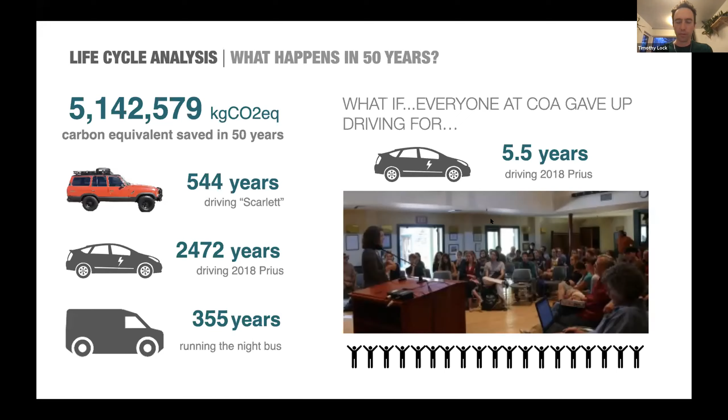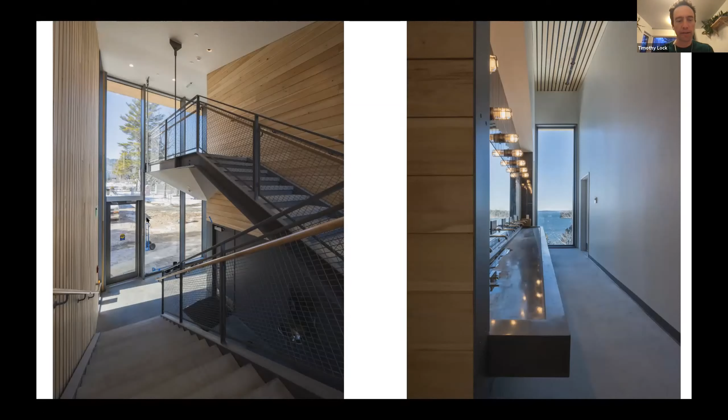A communal stair at the south entry to the building. Here we have a German curtain wall — not all wood, it's an aluminum pressure cap, but wood curtain wall with Ornilux glass, wrapping the stair. This is from the exterior, looking into the main entry of the building again, at the finish of construction, just a few weeks ago.

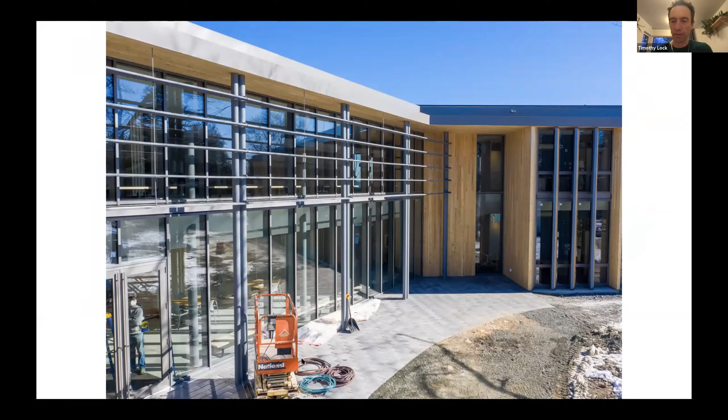Just some images of the detailing. We've got that same south stair from the outside on the right, and some images of the German curtain wall on the left.

And from the air, because it's always nice to see these projects from above. This is Frenchman's Bay behind the project, and this kind of frames this open area and hugs the edge before a 70-foot drop to the Atlantic Ocean just to the east.

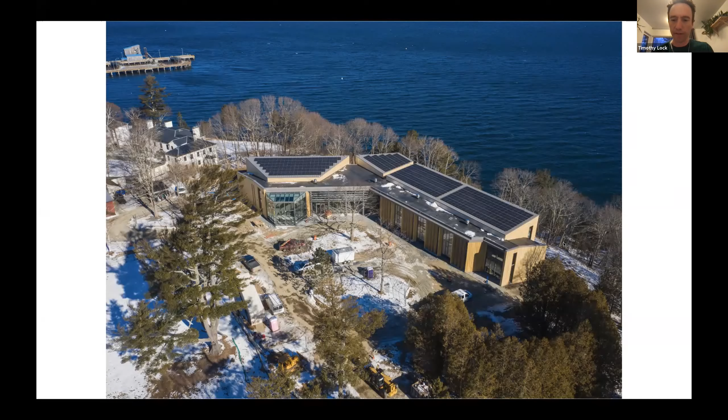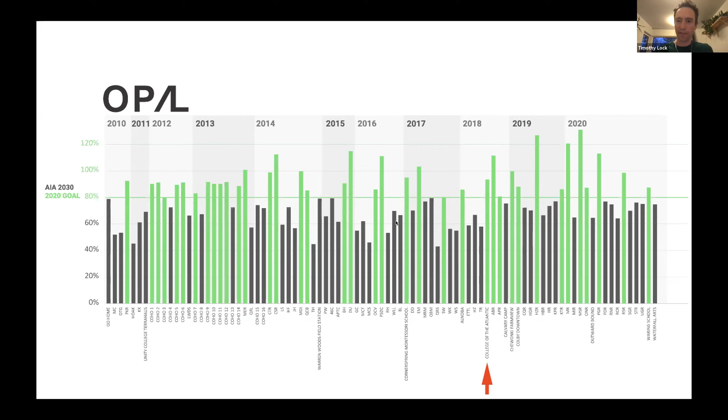And if we can do well by our big projects, do well by our big clients, then we can do a lot. We have this great opportunity to affect change positively through the buildings we design. We always try to keep this graph updated because it's nice to look back at and see how we're doing. And the final EUI, again, 10.62.

Buildings of this type on national average are usually over 100 kBtu per square foot per year. It's pretty nice to see a building that can do all this - high level academics inside with high needs, high energy spaces - and offset its energy just on its own roof, because that's only possible with the passive house plus this approach to sequestration. It really does come full circle when all those are tied together.

Michael, you're muted. Michael, you're on mute. We'd be pleased to answer questions, but I think we're dealing with some technical difficulties here. Blame it on Zoom, that's what we can all do this year, right? Blame everything on Zoom.